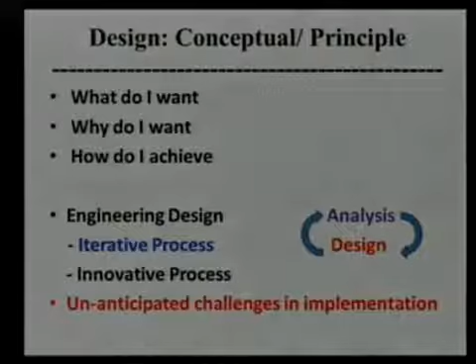What do I want, and why do I want? Now the next question is, how do I achieve it? So this is where our role came into the picture. When I put it as engineering design—I'm in the aerospace engineering department—I'll say we teach analysis, but can we teach design? Because design is a very iterative process and it involves a lot of innovation.

As part of this project, I found several unanticipated challenges when we tried to implement certain things. This is the learning and experience which we pass on to the next generation or the next student. So the first time you do it, there are a lot of challenges, and I'll just briefly give you a few of the challenges we faced, for want of time.

And of course, we teach analysis. Analysis is mathematics, physics, chemistry, and today biology is also coming into the engineering field, because of understanding how biological systems work in terms of autonomy or intelligence, and how you put that into your engineering vehicles. The design goal is achieving an end product. That's how I put it.

It involves essentially material, then manufacturing, then assembly, then of course I have to do the testing, and finally operation and maintenance, and the environment where I operate. So all these aspects come into the design goal, which I may not know right at the beginning of the project.

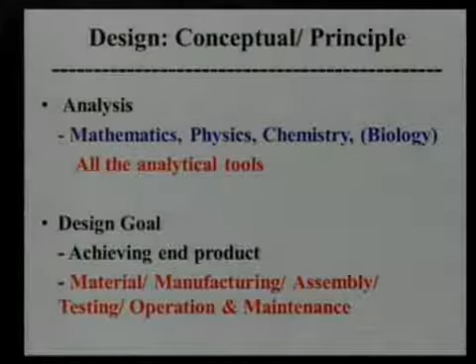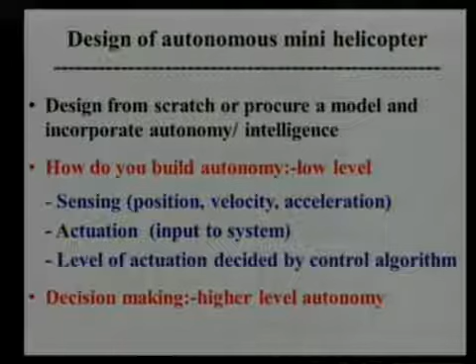So when we started, do we start from scratch in designing the entire vehicle, or procure a vehicle and incorporate autonomy or intelligence? Now the very word autonomy, intelligence itself is kind of defined, redefined, and I would say, okay, first very low level autonomy.

That is, I need to have sensing. Sensing means position, velocity, acceleration, both in terms of translation as well as rotation. Then you can go to a higher level, some chemical sensing or nuclear radiation sensing. So there are various types of sensors which we need to have.

Then of course the actuation, which is the input to the system. And the last part is what is the level of actuation which I have to do so that the vehicle can do the job which I want it to do. And this is where the control algorithm comes into the picture.

And of course the last, which I put it as decision making—that is a higher level of autonomy. Decision making, I mean suppose if you have an obstruction, how do I go around that, and various other levels of decision making which can come up. But right now we are at the low level of autonomy.

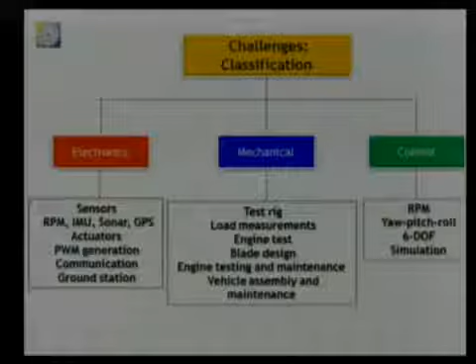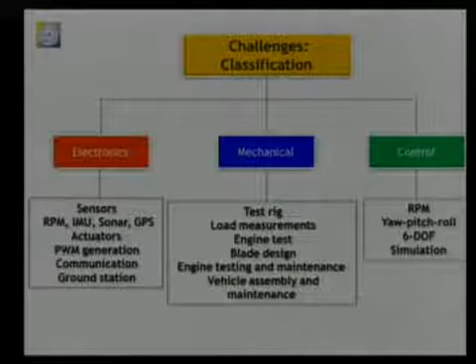I have classified my challenges because this involved a large gamut of subjects, right from vehicle dynamics, power plant, transmission, controls, communication, and then ground station, display, everything. So I classified them under three major topics: one related to electronics, one related to mechanical, and the other one related to control.

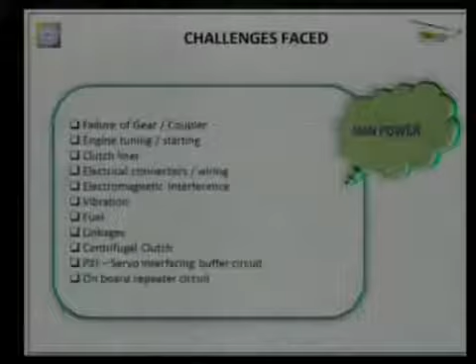I'll mention a few of the problems we faced everywhere, even though it's a procured system: mechanical system failure, then electromagnetic interference—when we use a sensor in some environment it doesn't perform, whereas outside it performs wonderfully. Of course, manpower is another challenge, which I found is very key in training the manpower and in retaining them.

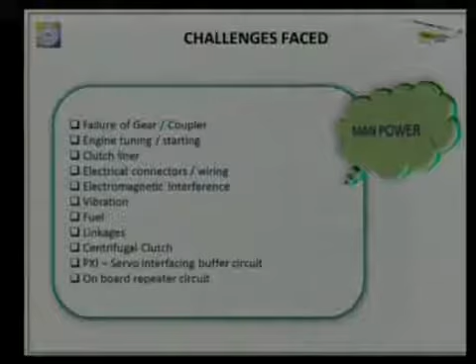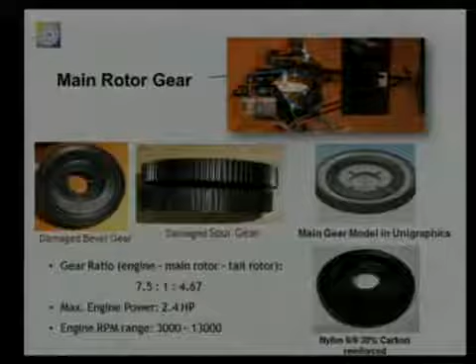One of the problems we faced was the gear, which was failing. One option is I can keep on procuring the gear, but I thought it's a good design problem to give to the student. So the specifications we gave were basically the gear ratio, the engine power, and the engine RPM range, and it should be less weight than what was already there, around 72 grams or something like that. So we went ahead.

How did we design? First, this is where analysis comes in—the strength calculation, and what is the operating condition. Given the dimension and operating condition, we did all the calculations, and then the material selection. First we have to know the availability of the material and the weight, and then testing, then manufacture, all these things.

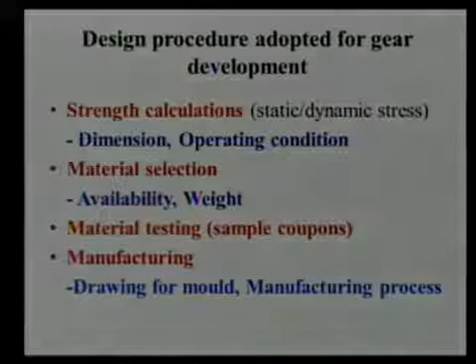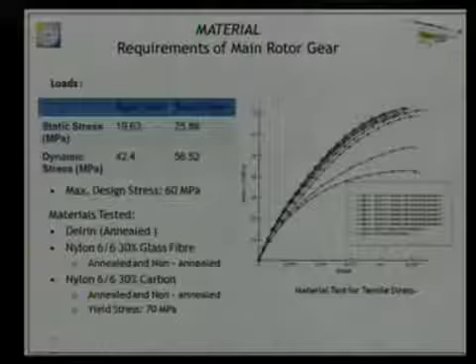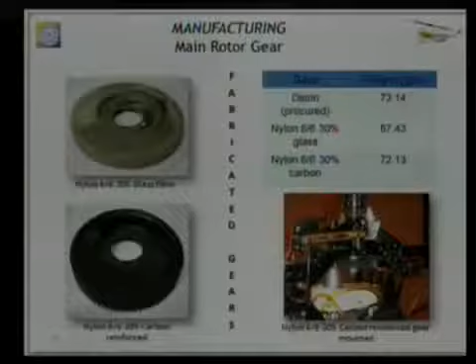Finally, I'll show a few pictures. We did the material testing ourselves in our lab. We had to procure the material and get repeatability of the material characteristics. For manufacturing, I can do rapid prototyping—very quickly I can make the gear, but it cannot even take the weight or the strength; it broke in one run. So finally we made the design out of nylon 6/6, and it worked for 3 years without failure.

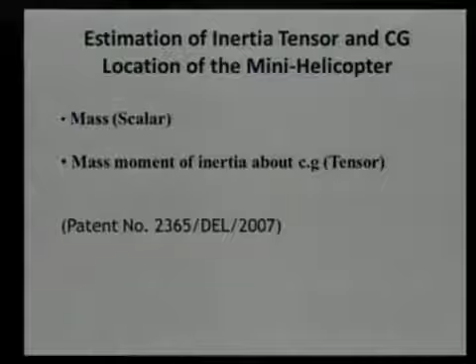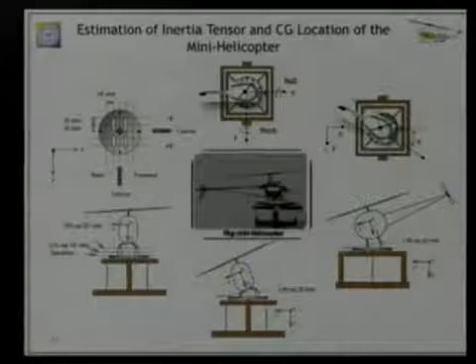One innovation we had was—normally, for a vehicle's control system design, we need to know the mass as well as the mass moment of inertia. Can we actually evaluate this by experiment? So we designed a test rig, and went completely through a mathematical approach, that is tensor and vibration. We were able to get all these properties, and people now like this procedure.

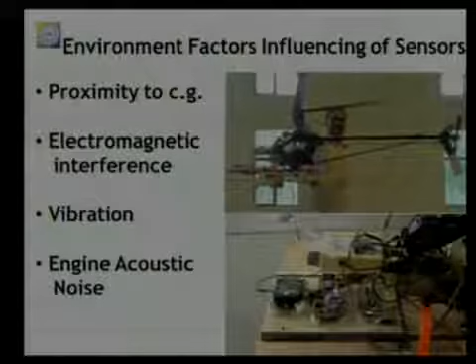So I need to find a sensor which can give me a good height estimation. This is still one of the major challenges which we face.

Finally, this is the last point I'll show, because we have demonstrated limited success in the control of the vehicle. Control of the vehicle—I faced a lot of challenges. One of the things I want to say is, this morning I think one of the speakers mentioned something very interesting.

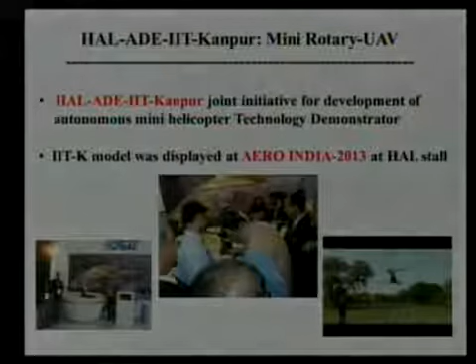I think he said learning, not teaching, something like that—it was very interesting. Learned, it is not taught. A kid learns to ride a bicycle. Yeah, he said learned and not taught, something like that, right? Learned and not—no, that's another one. I think Professor Ramani said learned. It's very simple.

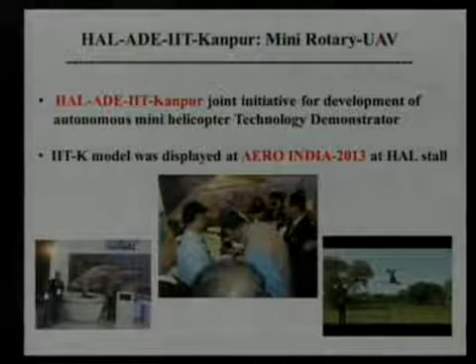The control—how I figured it out was that it was very difficult to control because it's an unstable vehicle. We know when we balance a stick, what do we do? We just do it, and a kid also learns that immediately. There's no mathematical algorithm. But the question is, how do I transform this into an algorithm so that I can do the control? Then I got some feeling—I look at it, I feel it in my hand, I stabilize it, and I tell the kid, this is what you have to do, you learn it. We incorporated that, and the vehicle became stable. So that was one of the very challenging tasks we faced, but this was not through any textbook learning.

We recently displayed this in 2013 at Aero India in the HAL stall, because now HAL, DRDO, and IIT Kanpur are having a joint initiative to make this vehicle a technology demonstrator for India. Thank you.